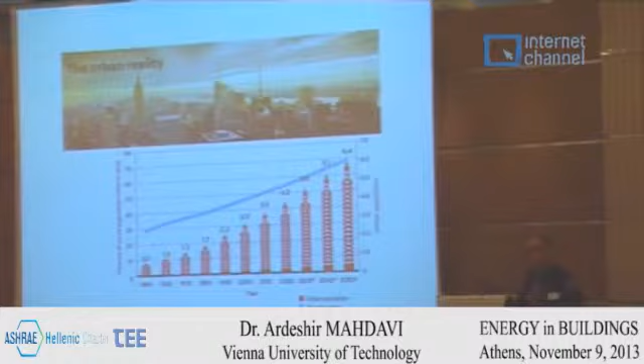I'd like to talk about maybe three M's with regard to this urban environment that we can reflect about. One issue is the physical constitution of the urban environment. In many cases in Europe, we have a heritage—a large percentage of our buildings are very old. They constitute a certain morphology which has a certain persistence.

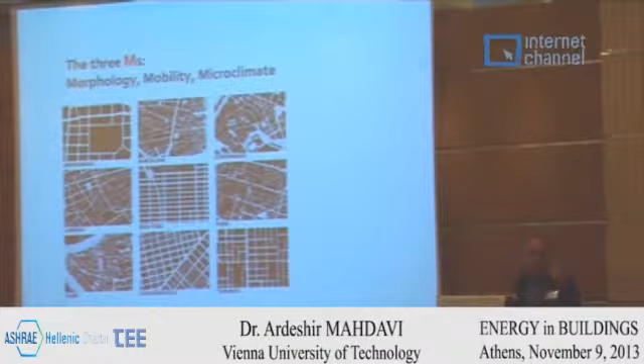But something we almost never talk about is the second M, which is mobility. Not a single word about that, yet it's a feature of the urban context which has major ramifications on the energy efficiency of the total built environment, far beyond the energy efficiency of individual buildings. It is an uncomfortable issue. It involves policy issues, lifestyle issues, and it's not being addressed. But at some point the building community has to get a grasp of it, because the interface between urban design and energy efficiency has this mediating effect of the transportation systems.

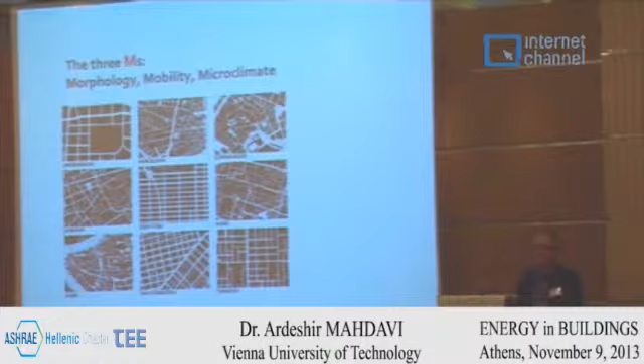And finally, the microclimate, which is the real part of my talk. As to the morphology, we could discuss that a lot, but I just want to draw your attention to a very simple fact: the more dense the urban context, the less the energy consumption. The less dense you make the urban environment—typically in US cities—the higher the average energy consumption. It's almost like a natural law. A dense urban context, independent of the quality of the buildings, has a major impact on the total environment. So morphology is an important issue.

Urban development project issues are important also in the third world, something that again gets forgotten a lot when we talk about technology fetishism—we talk about things you can attach to a building or put on top of it, and forget that urban growth, if not within certain morphological constraints, would create energy issues that we cannot solve.

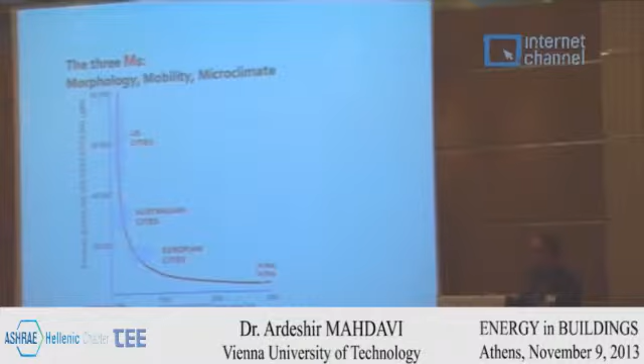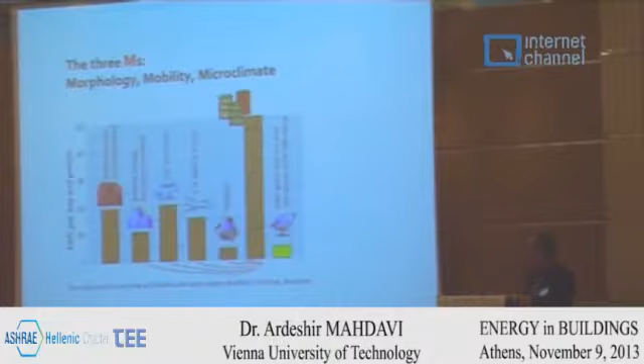We talked about this a little bit today, but I think it's important to understand here, just as a demonstration: I take a typical Viennese urban dweller, middle class, and look at the kilowatt hours of energy this typical urban dweller uses for the building, if we made them all passive standard; for a typical driving habit of 25 kilometers per day—believe me, Viennese drive more than that; if a person did one transatlantic flight every two years; and this is the typical gadgets we all use, from the hi-fi system to cellular phones and so on and so forth. This is the total average for this typical Viennese across these activities.

So this is if you would take all the buildings in Vienna from the current standard to the passive standard. And this is the solar collection potential if every Viennese had 5 square meters of solar panels.

So these orders of magnitude get close. We can maybe start talking about a very extended definition of zero energy buildings, but we would have to address issues of storage, seasonal storage, and other issues. Otherwise, the discussion remains at the level of futurism, technological futurism, without a lot of depth to it.

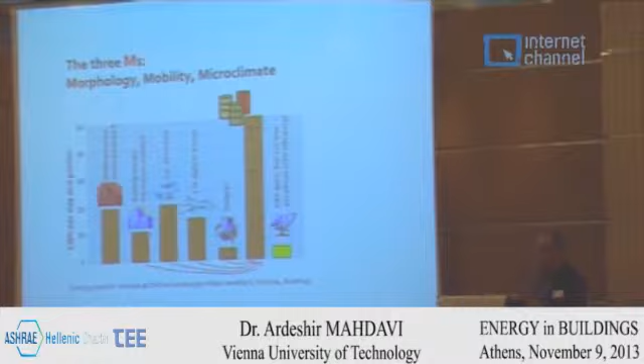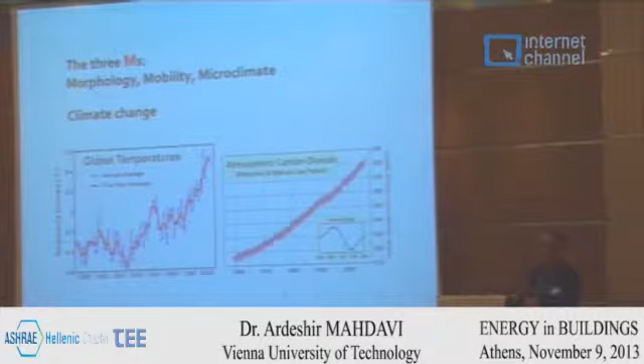Now, getting closer to what I'm supposed to talk to you about today, which is the urban microclimate. It was alluded to before that generally we don't talk about urban microclimate per se, though we have the issue of macroclimate change, which we've been aware of in theory. This is an early study done by one of my students, looking at the thermal performance of various typologies of buildings.

Envisioning if the climate is expressed in terms of the increase of cooling degree hours, what ramification it would have for the cooling energy increase. Dr. Rollin mentioned that the increase of cooling load will become a major problem as an implication of climate change, and that is very true. You can see orders of magnitude of 100, 200%, for example by changes of cooling degree hours of about 100 to 150%.

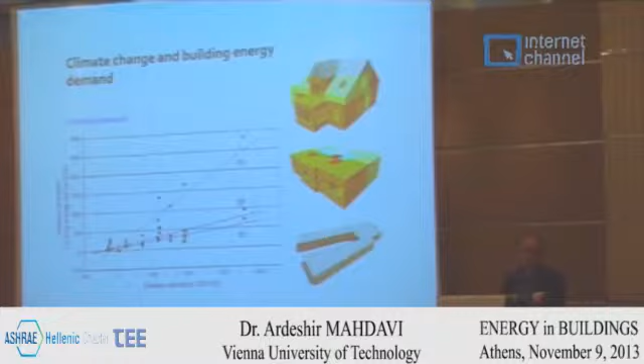We have been looking beyond the notion of climate change, also at the interesting features of the urban microclimate per se. Many of you are energy specialists, maybe you do simulations, and your energy boundary conditions for this type of modeling come from a weather file, a standard reference weather file. But typically the data constituting those weather files comes from some weather station at the airport or wherever. The issue is that the urban microclimate is much more interesting and complex than that, and it's affected by a number of factors.

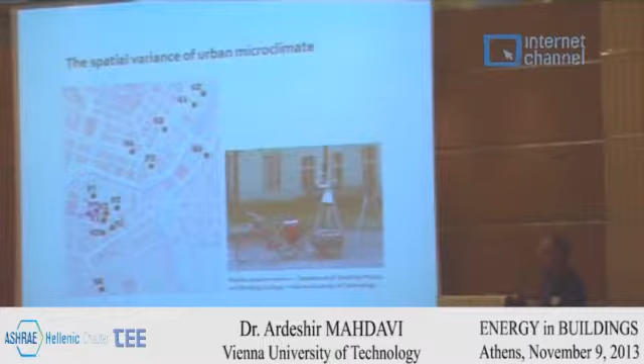Just to provide you with a flavor of that, here is an example: we have mobile micro stations that our students, as part of their training, use to go around the city and figure out what the microclimate is. Here is one example of the type of variance you see for the same period of time in areas that are fairly close, no more than 1 kilometer apart. Nonetheless, you see temperature ranges of about 3 Kelvin difference depending on the location and its specific features, such as presence of trees, presence of bodies of water, shading, the sky view factor, the properties of building surfaces, the albedo, and similar variables.

So there is a variance that we typically, in our standard building energy simulations, do not actually take into consideration.

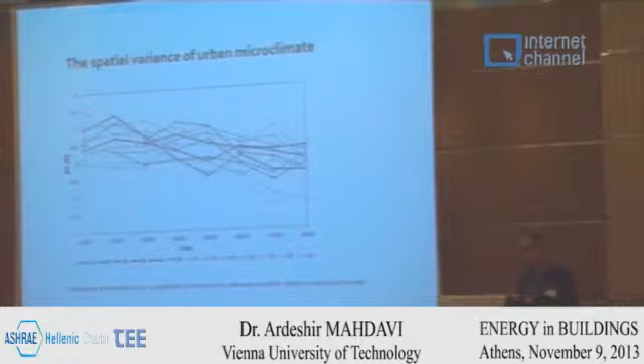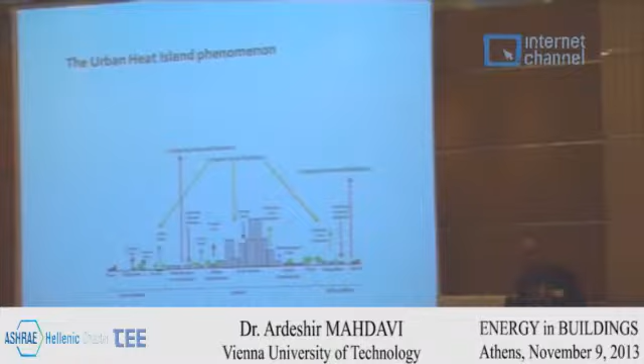Most of you are familiar with the notion of urban heat island, which was referred to today as well. The basic idea is that in densely populated cities, especially in the center, due to the number of heat transfer phenomena and anthropogenic changes done to the natural environment, we get an effect: a deviation of the urban thermal conditions from the surrounding rural conditions. There are a number of heat transfer phenomena you're all familiar with - the absorption of shortwave solar radiation, change of albedo, presence of impervious surfaces that change the water household of the city and the evapotranspiration effects, infrared radiation, and anthropogenic heat emissions through transportation, heating, cooling, and so on.

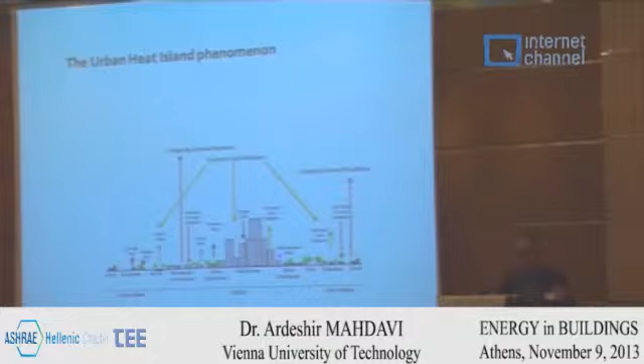As a result, if you look at rural temperatures versus urban temperatures, you see a phenomenon in which the cities do not cool during the night, the center or main urban part of the city, as they used to do.

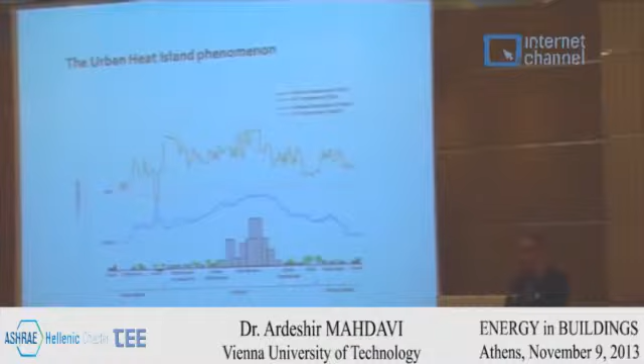I'm in absolute agreement with the presentation by Mr. Roulet before about the priority of passive methods. But if we don't pay attention to this phenomenon, it will soon be the situation that even in Middle Europe, you don't get enough delta T during the night to substantially cool the mass of the building. If you cannot do that, you lose a major reservoir of passive cooling technologies, even in Middle Europe. So this is something we have to take into consideration.

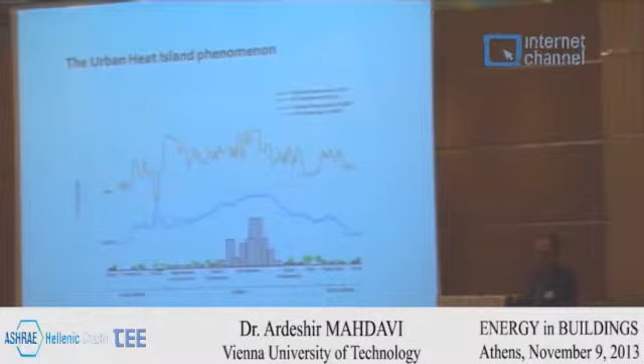A question that has emerged in the last few years: okay, we know about this, we've been talking about this, but to which extent does this phenomenon really exist and how serious is it? This was partial reason for the initiation of a European project called UHI, funded by the EU, with a number of partners in Central Europe participating to address the extent of the urban heat island phenomenon in Central Europe, and to reflect on possible adaptation and mitigation measures and the tools available for municipalities and planners to address it.

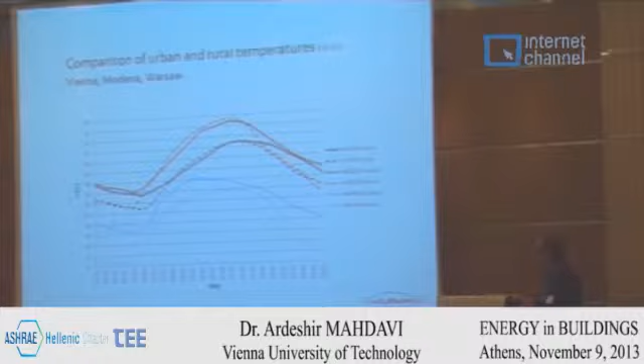You see that in all cities a major difference exists, especially at nighttime. The differences can be quite dramatic, as you can see, for example, in the case of Warsaw.

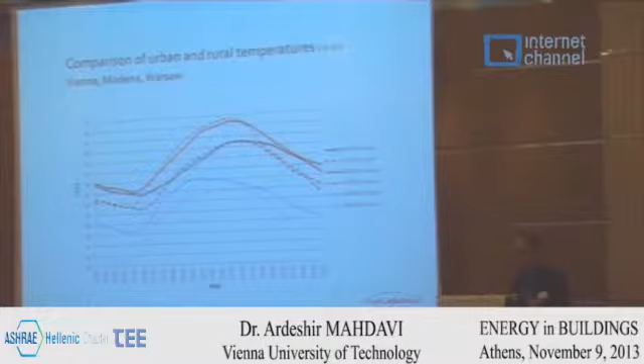Another way to look at it is using the indicator of urban heat island intensity, which is simply the difference between the rural and urban temperature. Like many indicators, there's an issue of to what extent it really expresses the phenomenon, because your selection of the urban and rural locations for temperature measurements affects that.

There are also colleagues, such as Tim Oke, who suggest we should use other indicators of urban heat island intensity. I don't want to go too much into this technical discussion, so let's take this difference simply as one indicator.

If you look at it across a typical summer day, you see the differences here. Zero would mean no difference between rural and urban temperature, and a positive difference means the urban temperature is higher, as you see especially during nighttime. The urban temperatures in all of the cities we looked at are higher, though sometimes during the day a city might actually show a somewhat lower temperature than the rural temperature.

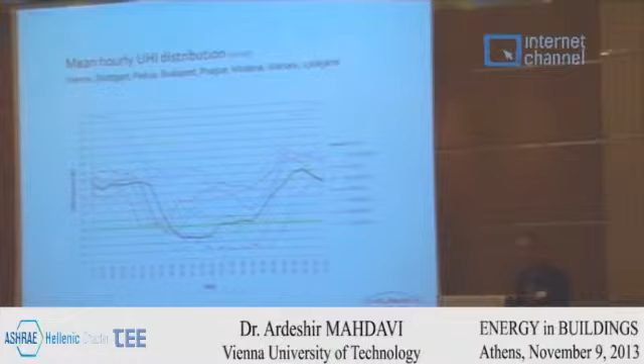As you see, in some cities the conditions are fairly dramatic. Some have already started to address that with certain measures, including green roofs, increased vegetation, or reduction of the dominance of transportation in the life of the city. Those are some of the mitigation measures that have been considered.

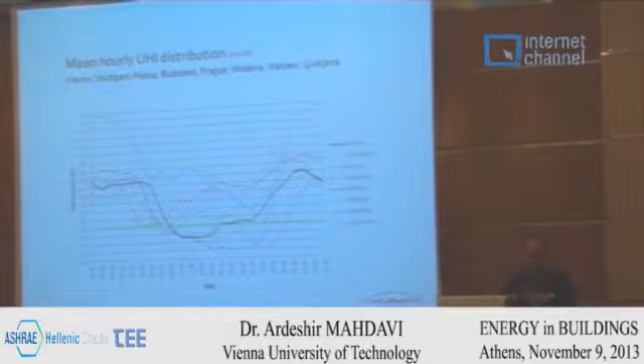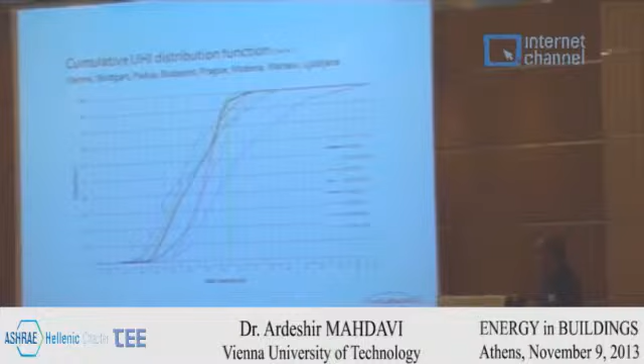Another interesting way to look at this data is in terms of a cumulative distribution function, or frequency distribution, of UHI intensity. It's a question of whether the alarm signal should be set at 3 degrees Kelvin or not—it doesn't matter so much, but you can see that if we look at 3 degrees Kelvin as the urban heat island intensity threshold, almost all cities show some percentage of time above it.

In Warsaw it's about 50% of the time, in Vienna about 95%, meaning the urban heat island is below that threshold, or you could say 5% above it. So in most cities, we have at least somewhere between 10 and 20% of the time where this measure of urban heat island intensity is transcended, which is something that has to be addressed.

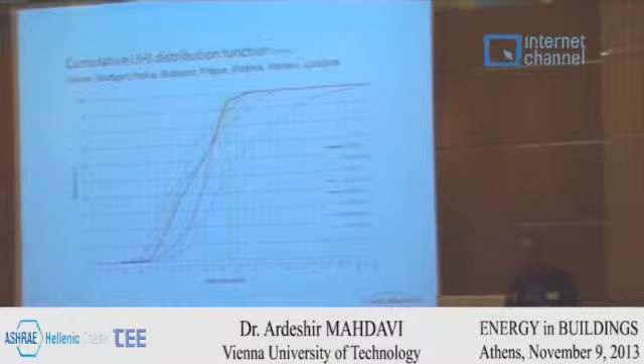In the framework of the project, we established that this phenomenon exists and that it is significant. But what are the possibilities, and especially what can the municipality do?

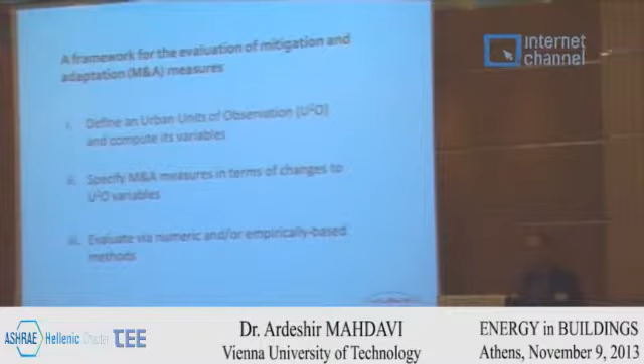There exists no such tradition of having formulated approaches, from the EU down to individual countries, to address that. So it's a task for current scientists to address those.

One schema that we propose within the framework of these projects is to address this by looking at a certain area of an urban context, which we call an urban unit of observation. We define that area in which, for example, you are contemplating invoking mitigation measures, and specify that in terms of a number of variables.

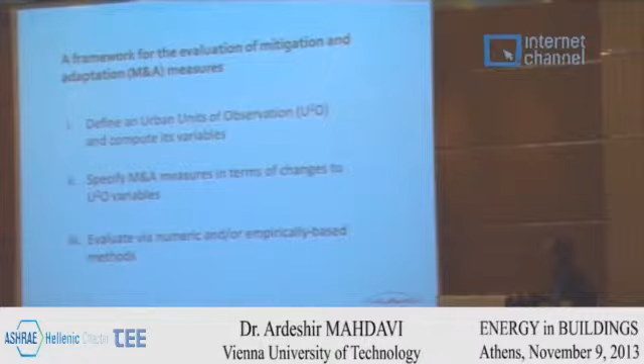We consider the mitigation measures we're projecting in terms of changes to those variables. We suggested thinking about it this way to make the discussion about mitigation measures more specific and possibly quantifiable. That is a challenge we tried to address through this proposal.

Once we have this shift to measurable things we can do at the scale of a relatively large unit of urban fabric, we could then think about in which way we can project the effect of those measures.

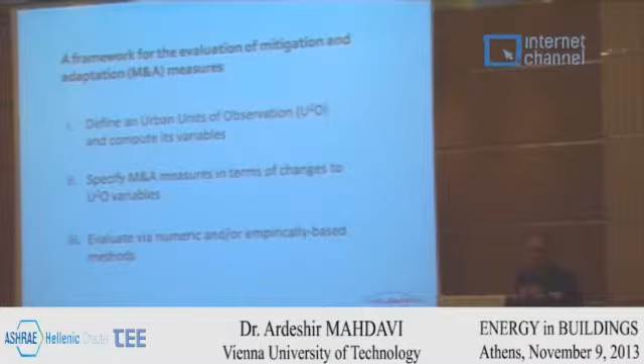In the case of buildings, as you see today at many conferences, not only ASHRAE, we now have tools at our disposal to project 'what if' scenarios—what would happen if we improve the insulation, change the systems, or change the glazing, and so on. When we talk about an urban unit of observation, that is somewhat more complex, if you'll permit me an understatement.

So here, just to show you the example of this process, we took a little part of the city of Vienna, in the central, relatively dense part of the city, and we look at it as an urban unit of observation, and we define the salient variables where we think or suspect variables, or potential variables which constitute the problem and can also address the problem. I will not go into all of that in detail because it will take some time, but you see, for example...

Factors such as sky view factor: what percentage of the sky is actually visible from a point of view in terms of the short-wave radiation incidence and in terms of the infrared back radiation during the nighttime. What is the aspect ratio of the streets? What fraction of the urban city is actually built? What fraction of it is unbuilt? And what fraction of the unbuilt is actually impervious versus pervious? What is the green area fraction and bare soil fraction? What is the mean building compactness and also some semantic properties?

What is the albedo, emissivity of surfaces, thermal conductivity, specific heat capacity, and so on and so forth. So get the main constituents of the characteristics of the urban units of observation in terms of geometry and morphology, and in terms of the semantic properties, physical properties, plus some information about the transportation, vehicles, and the anthropogenic heat emission due to the buildings and industry, and so on and so forth.

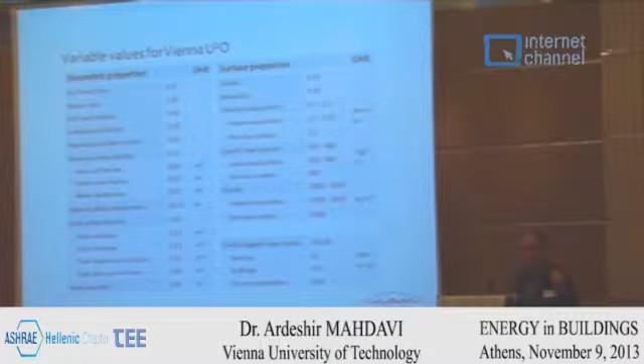Now, once you have that type of basic unit of observation, you can contemplate different mitigation scenarios. With these groups of our colleagues in these cities, we composed such measures together with the municipalities, for example, looking at possibilities of planting trees, having green roofs, or introducing cool walls and water bodies, and so on and so forth.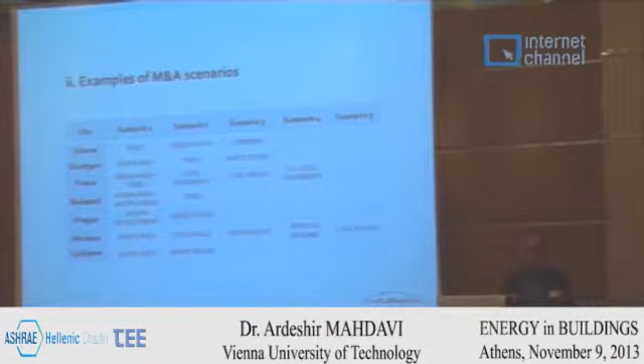So each of the participating cities conceived a number of scenarios that they deemed possible and realistic, and we represented those. This is an example of Vienna, for example, trees, green roofs, or a combination thereof.

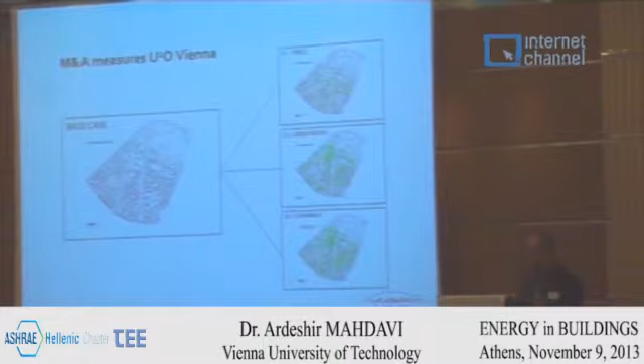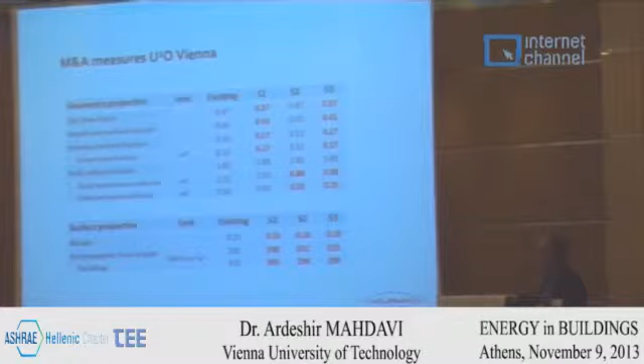And we represented those mitigation measures as changes in the relevant variables of the urban unit of observation - for example, the sky view factors, what these scenarios would do if we would make these type of changes. So having a formal, rigorous way of reflecting potential projected changes into this unit of observation.

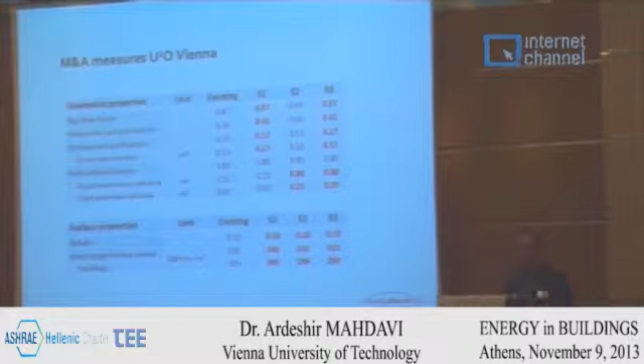You can also show it in terms of these type of differentials. If you want a better visualization, you could see, for example, how the base case could be manipulated through different measures and how you can represent those changes in a way that is visually more easy to process as opposed to tables. So these are, for example, for Vienna, and this is for Padua.

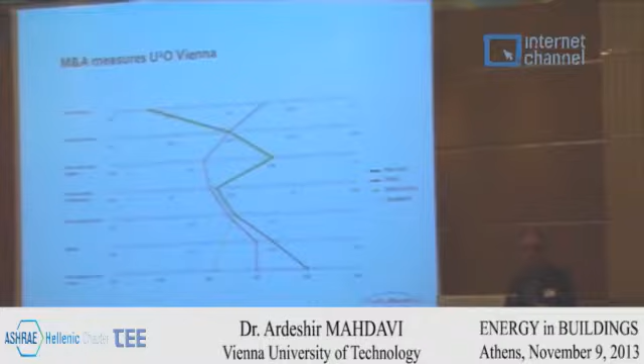The colleagues came up with a number of alternatives or options that they wanted to explore, and this is another one from Modena - different measures and how these would impact the values of the variables of the urban unit of observation.

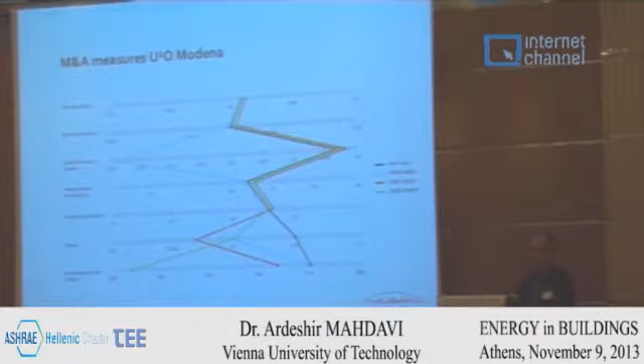Once we had these multiple scenarios and their representations, we could contemplate different types of models. Of course, we could also talk quite a lot - there are different approaches to modeling. Some of those are based on extended numeric simulation involving, for example, computational fluid dynamics and so on and so forth, with the caveat that they are fairly difficult to use, fairly slow. But it seems to me that is one of the viable options that in future will become more amenable for parametric studies.

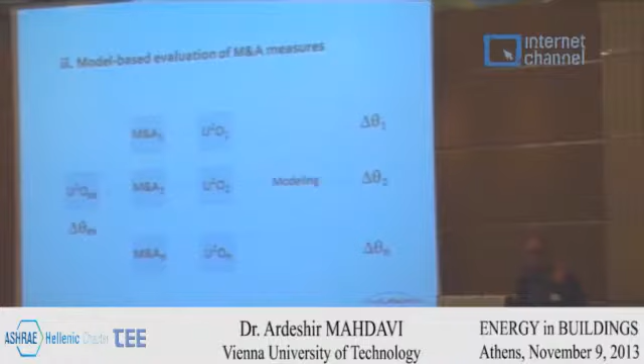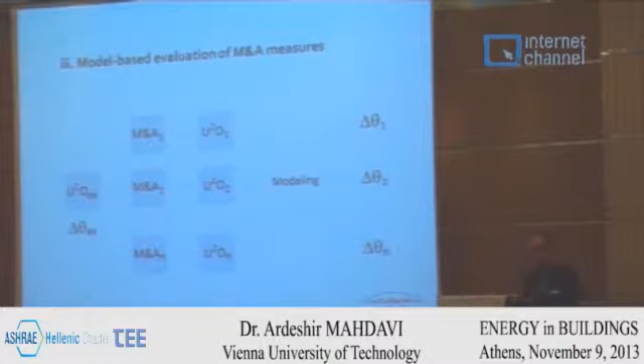When we went through a process with all the partners, most of them decided for these types of modeling studies that would give them things like, for example, this temperature distribution in the micro scale as a function of different measures, or they look at, for example, thermal comfort implications of such measures. We could attempt to model those.

I mentioned the issue of energy, but obviously the urban heat island affects also significantly the outdoor thermal comfort of the occupants of the city. If you think about heat waves, one of the problems of climate change and urban heat island is not only that you get an increase in average temperatures, but an increase in the number of days with extreme temperatures. Even on average, you could live without a cooling system. The problem is that if you have these recurrent heat waves, this will encourage people to install cooling aggregates because of those very extreme situations. And there are people who make arguments on that based on the issue of health and so on and so forth.

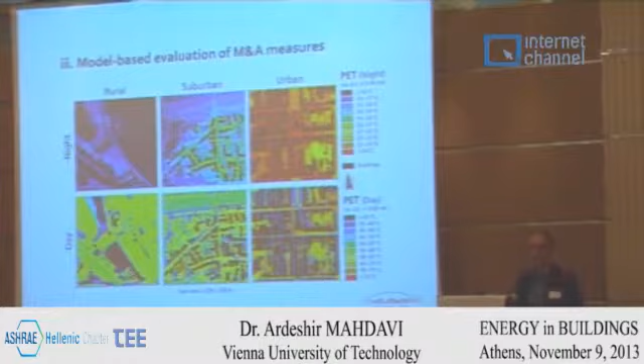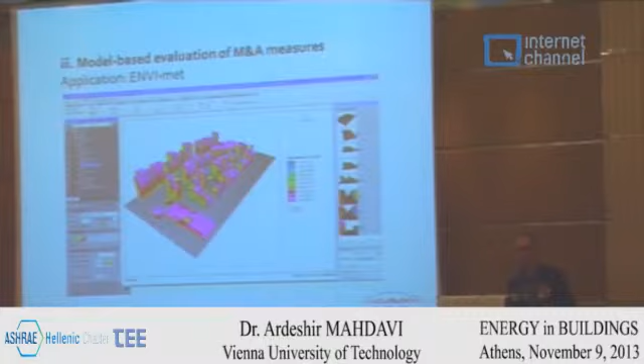Most people use the available application called ENVI-met, which is a CFD-based numeric calculation that allows modeling in a fairly simplified way the physical fabric of the urban context and then calculate certain things like airflow and temperatures. One idea is how would we represent the results.

One result is, of course, classically to look at what happens to a typical reference state temperature. If you do a certain measure, what happens to the urban heat island intensity, or simply for a reference day, look at the potential in terms of Kelvin hours.

For example, if I would plant trees, what reduction of cooling hours would I achieve? If I would do green roofs, what level of cooling reduction would I achieve in terms of Kelvin hours, or if I do a combination of those. These are some results for Vienna.

These are some results for Padua. You see these measures, cool roofs and green areas, and you see again the impact on urban heat island intensity and the reduction of cooling potential or cooling need. Another example for Modena, the respective results.

So I think it's a first systematic approach to capture the existing situation in part of a city, to express the existing city in terms of some rigorous, measurable values and variables, conceive possible improvement measures such as vegetation and water, or changing the traffic conditions, and then use modeling techniques to estimate the effect of those.

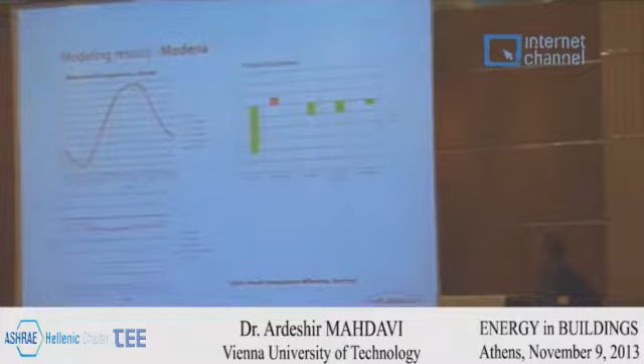As I mentioned before, one thing of interest: I'm a great fan of modeling, so to speak, but at the same time very skeptical of purely modeling-based assessment. If you compare real energy requirements of buildings with simulated ones, you notice there are a number of uncertainties involved. A good simulation specialist would never give people one number and say that's going to happen, but would always express an uncertainty.

For example, as a function of occupants' behavior and things like that. So I would like to look at this type of modeling also in the context of asking what empirical possibilities at least allow us to partially validate these models, and to see what is the range of that uncertainty.

To address that, something that occurred to us, a very interesting observation, is when you arrange this variable in a certain way, you see that the improvement results tend to, so to speak, collect themselves on one side or the other, which basically says that certain variables have predictable effects.

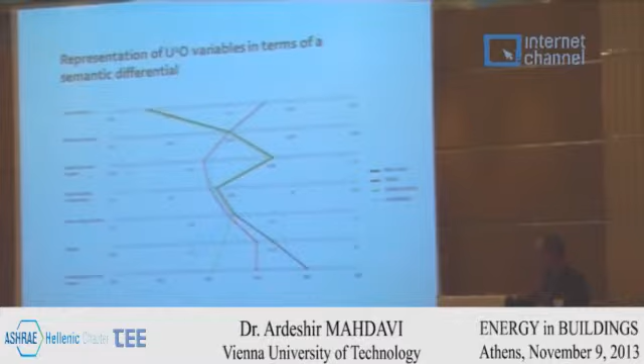Urban heat island intensity. So we looked at the city of Vienna, and we looked at a number of positions where we have detailed data of microclimatic conditions. We did this morphological study of conditions around these measurement points, expressed them in terms of the value of these variables, and tried to see if we can get certain relationships. We are, so to speak, at the beginning of this process.

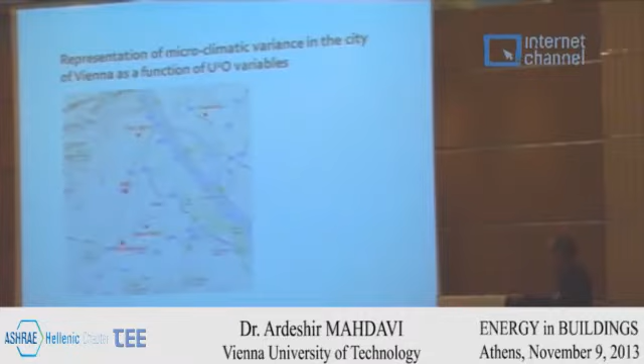Here you see, for example, the features of different areas that I showed before. These are the points of measurement in the city of Vienna, and these are the characteristics of the urban fabric in this area. You see there is a gradation.

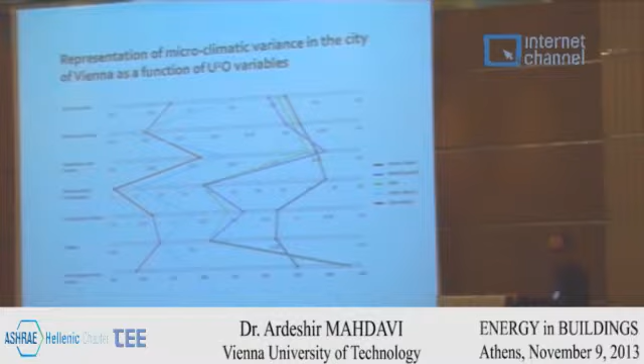So we followed this gradation, and we find certain interesting relationships, for example between the sky view factor and the urban heat island intensity, between the impervious surface fraction and the urban heat island intensity, anthropogenic heat output, the built surface fraction and urban heat island intensity. And I remind you that these are actually fairly intuitive - if you think about the local microclimate, you'd be able to kind of explain that based on that.

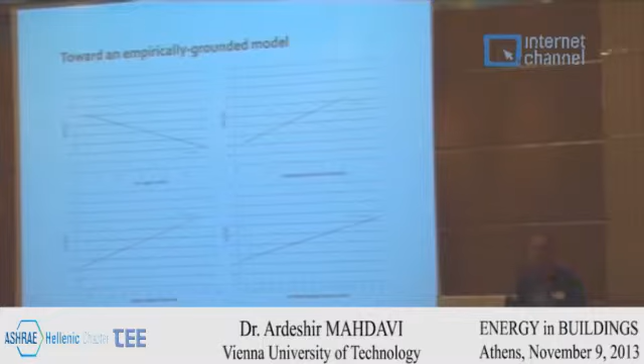So we are following these empirically based indications to develop, parallel to the numeric method, some simpler empirically based methods, which would make it easier for municipalities, because that's the question they always ask: if I do a certain measure, it costs a lot - what is the scope of the benefits I would get? With these methods, we would have more confidence, beyond the numeric, on those expectations.

Putting that together, I think we are on the verge of a situation where we should stop talking about individual buildings as the solution to energy efficiency. We should stop talking about individual technologies as, so to speak, a panacea for the overall energy efficiency problem. We really have to look at the urban realm and the connections of the buildings, transportation, recreational quality of the city, and those type of issues. Thank you.